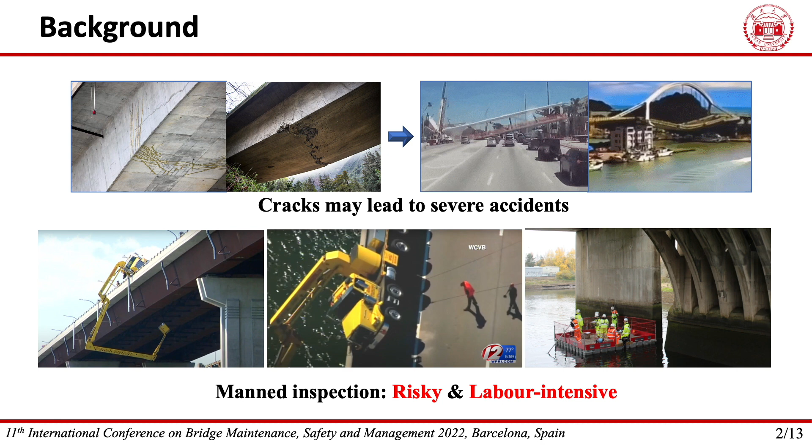Two representative works were published recently to solve these problems. Jang, etc. created a ring-type climbing robot. The camera was about 25 centimeters from the surface of the bridge pier. Then used the SegNet model. The crack with a width of 0.086 mm can be detected.

And another equipment was designed by Jiang and Zhang. It was a wall-climbing unmanned aerial system with the capability of detecting 0.1 mm wide cracks based on the embedded SSD method. And the working distance is about 15 centimeters from the beam. And both of these two studies require that the equipment should be sufficiently close to the bridge surface, because the tiny cracks photographed from a longer distance are often too small to be detected by the existing algorithms.

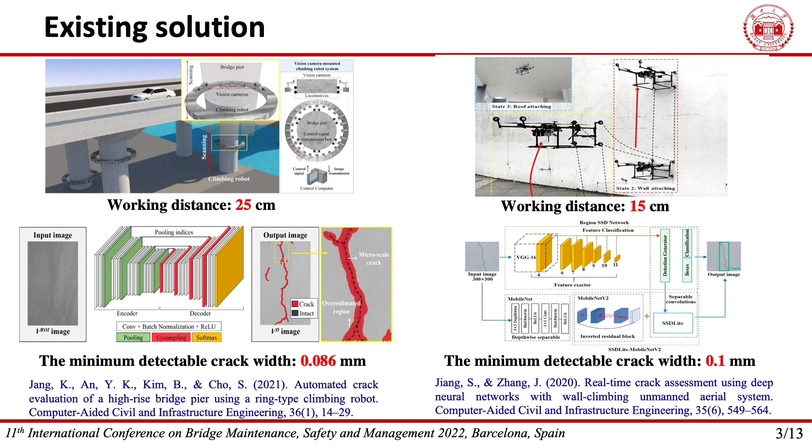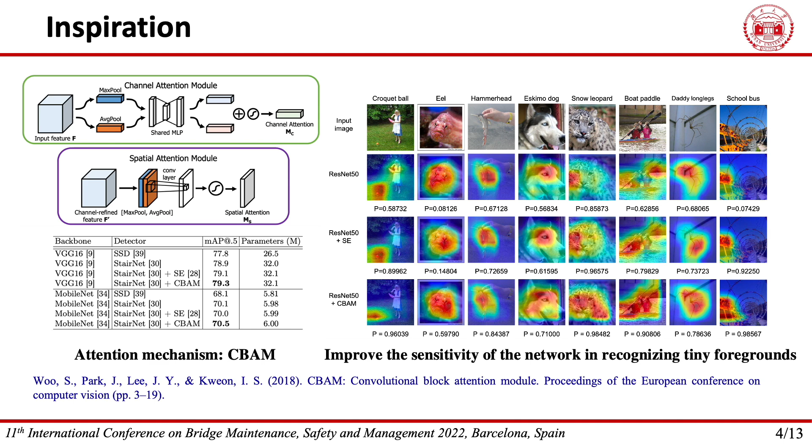So, we decided to develop a highly sensitive algorithm for the segmentation of tiny cracks, so as to improve the detection efficiency and security. We noticed that the attention mechanism was developed for modeling the dependency between pixels and has been proven beneficial in segmenting cracks. And Woo, etc. proposed a novel convolutional block attention module named CBAM. CBAM combined both spatial attention and channel attention mechanisms. We noticed that the CBAM can be conducted to improve the sensitivity of the network in recognizing tiny foregrounds as shown in the right picture.

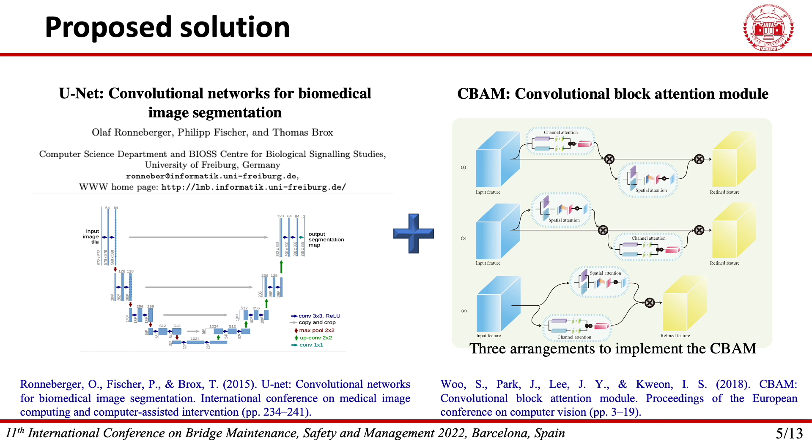So, with the aforementioned inspiration got from the CBAM, we decided to embed this useful attention mechanism into the encoder-decoder architecture to improve its performance in segmenting tiny cracks. Here, an encoder-decoder architecture with the feature fusion and attention mechanisms was developed to solve problems encountered in tiny crack segmentation on bridge surfaces. Firstly, a novel ResNet-based network architecture was proposed for extracting crack features. Then, a multi-scale feature fusion operation was introduced to the head of network to enhance the edge details of tiny cracks. Additionally, the architecture has a dual attention module to help separate cracks from the background.

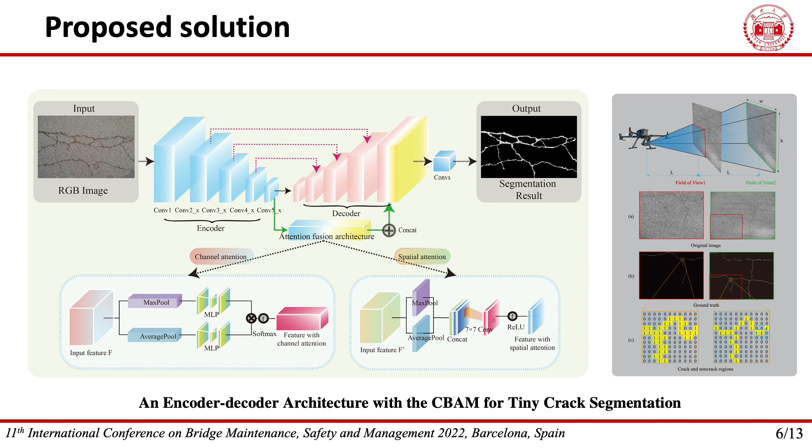Finally, a joint learning loss of the cross entropy and similarity was developed to improve the poor convergence caused by the severe class imbalance of tiny crack images. With the deployment of the proposed method, the UAV will be allowed to detect the tiny cracks on the surface of the bridge at a longer distance, which improves the detection efficiency while enhancing the safety of the flight process.

Here is a brief introduction to the implementation process of the attention mechanism used in this article. And for the spatial attention, the average and maximum pooling process are applied in the channel direction, and the output results of the two pooling operations are combined together. The combined feature vector is then applied to a 7x7 convolutional layer. Then the sigmoid function is utilized to generate the spatial attention weight coefficients.

Then, for the channel attention modules, it can be seen in the left figure that feature F begins with two pooling operations, including maximum and average pooling, and that two resulting feature vectors with a size of 1 by 1 by n are then input into a shared multi-layer perceptron to further capture the channel feature. To build the final channel attention feature map, the output feature vectors are combined element-wise and activated using the sigmoid function. And the visualization results of the channel attention vector and spatial attention map are shown in figure below.

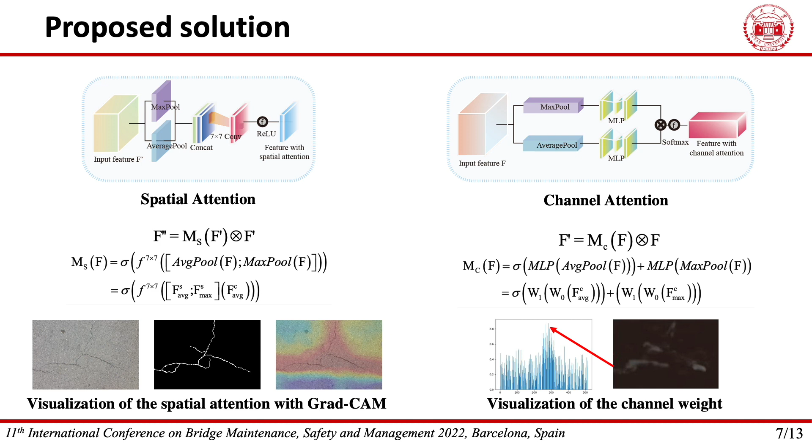The 2D spatial attention map in figure shows that the spatial attention successfully guides the proposed network to put larger weights on tiny cracks, and the vectors indicate that the proposed channel attention mechanism generally tends to choose larger weights to act on tiny crack feature maps. To prove the effectiveness of the proposed method, experiments were carried out.

Two open-source crack datasets, CrackTree200 and CFD, were selected to evaluate the efficiency of the proposed method. To facilitate apples-to-apples comparisons, the present study replicated all assessment networks using the PyTorch framework, and these listed evaluation indicators were used to quantify the model performance.

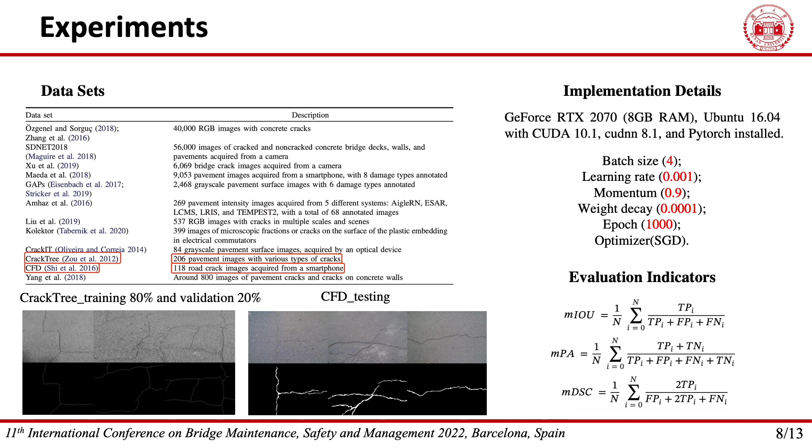Then, comprehensive ablation experiments for each component were conducted. To begin, the dual attention mechanism's efficiency was assessed using a baseline model, and an appropriate embedding placement for dual attention mechanisms was determined. To maximize its effectiveness, two challenges arise while attempting to integrate the two modules into the network. The first challenge is determining how to combine the two attention modules, and the second one is determining where to place the two merged attention modules.

For the first problem, it was discovered in the previous study that sequentially arranging the channel attention module in front of the spatial attention module produced the best result. The second issue is really connected to the network architecture design, which was discussed in this ablation study. The dual attention module was considered for embedding in 4 possible positions, including after feature 0, feature 1, feature 2, or feature 3 in the upsampling decoder.

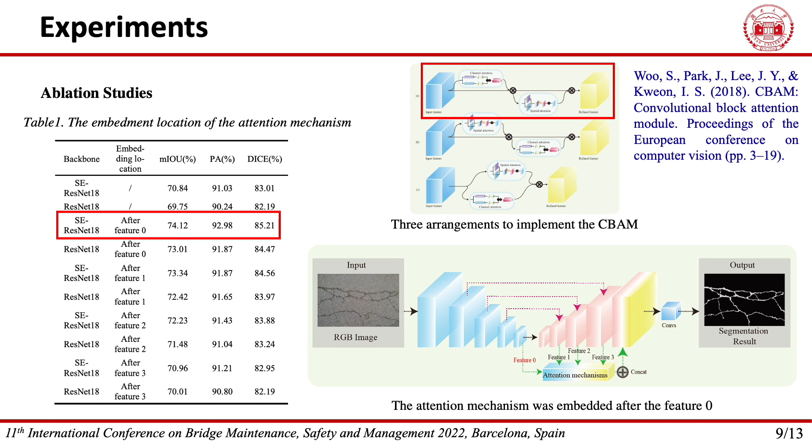As seen in Table 1, embedding the dual attention module deeper can enhance the segmentation performance of the model. This is because low-resolution features that contain more semantic information frequently have a bigger receptive field, and the attention mechanism can acquire more context information by capturing global information.

The performance of the ResNet series-based model is then compared to that of the model improved by the dual attention mechanism. And a combined learning loss of cross-entropy and similarity is proposed to alleviate the poor convergence caused by the class imbalance of micro-crack images.

As shown in Table 2, the suggested dual attention mechanism has a noticeable influence on network performance, increasing it by an average of 3.07% for the MIoU. Besides, the performance of the SE-ResNet50 with the dual attention mechanism outperforms others, which may be due to the fact that the ResNet50 and the dual attention module achieved the optimal solution simultaneously.

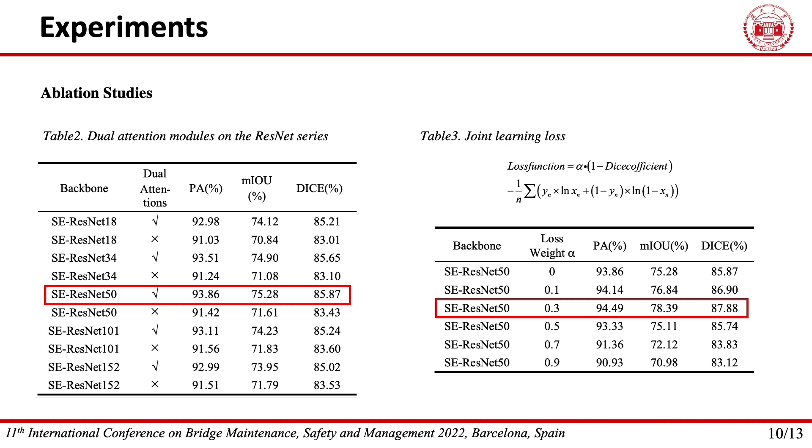The SE-ResNet50 with dual attention mechanism was used in the subsequent study, and the performance of the crack detection network will be greatly impacted by the imbalanced problem of the tiny crack images. To address this issue, a joint learning loss of the cross-entropy and similarity was proposed, as expressed in the equation. As shown in Table 3, the parameter alpha has a significant effect on the results, and the best result is obtained when the value of alpha is set at around 0.3. Each component and the parameter of the proposed method have been optimized through the ablation study.

To further demonstrate the proposed method's effectiveness, 4 typical deep learning-based models, including the FCN, SegNet, DeepLab v3, and UNet, were selected for comparison based on the CFD and CrackTree200 datasets. The table contains the comparative results, while the figure below displays a variety of segmentation instances. According to the table, the proposed architecture had the highest MIoU.

As seen in the figure below, the proposed method's predicted outcomes had fewer incorrect and missed detections than the other 4 approaches. The results demonstrate that by including a variety of contextual information, the proposed architecture can mitigate the influence of noise on the identification of tiny cracks, and some supplementary work was added with the UAV field test.

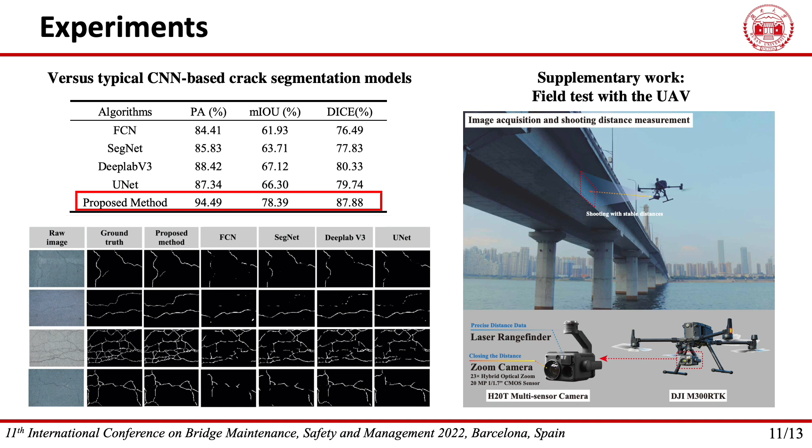The proposed architecture aims at tiny crack segmentation on the surfaces of the bridge. The entire architecture includes a ResNet-based encoder, a decoder with merging context information from corresponding layers of the encoder, and a fusion architecture with supervised learning weights and dual attentions. In addition, a joint learning loss of the cross entropy and similarity is integrated into the network to handle the issue of the imbalanced class distribution. The performance of the proposed model was compared with 4 typical segmentation models. The following conclusions can be drawn based on the obtained results.

In summary, the benefits of improving the detection accuracy of tiny cracks are twofold in engineering practice. First, for the same UAV, a further shooting distance and a larger shooting FOV are allowed to improve the efficiency and the safety of the inspection process. Second, allowing the use of a camera with a lower resolution under the same shooting distance reduces the detection costs.